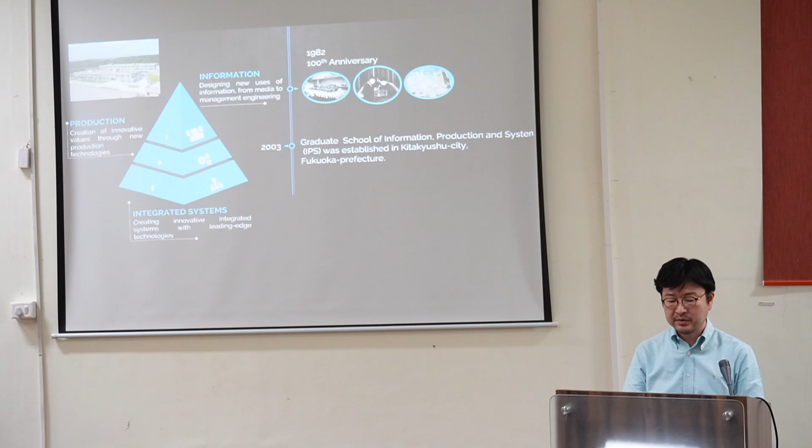In 2003, our Graduate School of Information, Production and Systems was established in Kitakyushu, Fukuoka—not in Tokyo, but in Fukuoka. This graduate school has three fields: the Information Architecture field, the Production System field, and the Integrated System field. We call this IPS. In 2022, we celebrated the 140th anniversary.

Waseda University has in total around 50,000 students, and among them around 7,000 are international students. So there are many international students in Waseda University. The IPS is located in Fukuoka—here is Tokyo, but we are located in Fukuoka. In Fukuoka, there are many international students, and we are recruiting students not only from Japan, but from many countries.

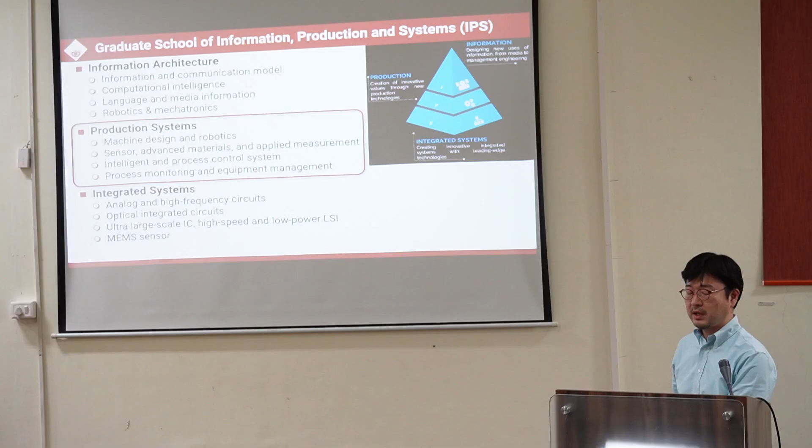As I told you, the name of our school is the Graduate School of Information, Production and Systems, and we have three fields. I belong to the Production Systems field, and Professor Matsumaru, who will have a talk the day after tomorrow, belongs to the Information Architecture field. Each field has around 9-10 faculty members, and inside the Production System field there are 9 professors now. There are several professors who research robotics. So this is a brief introduction about our graduate school.

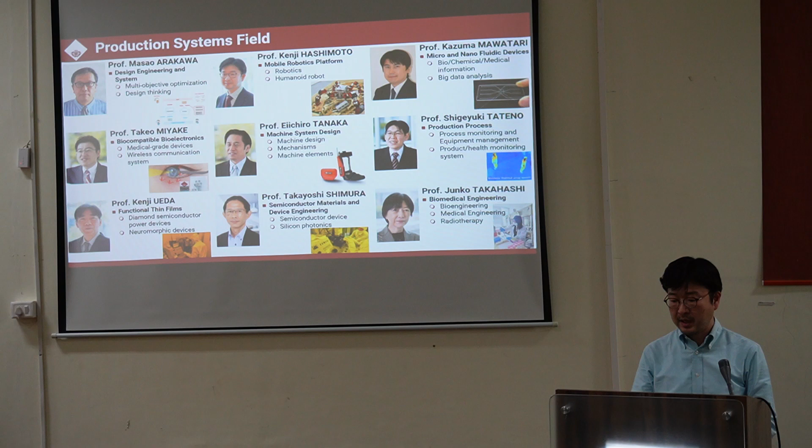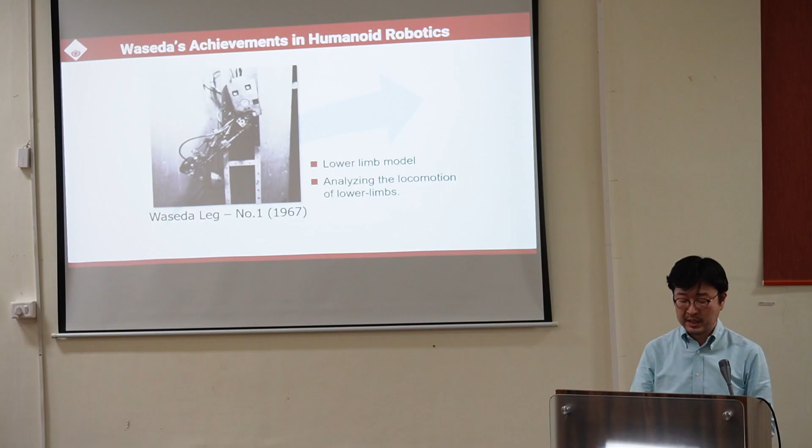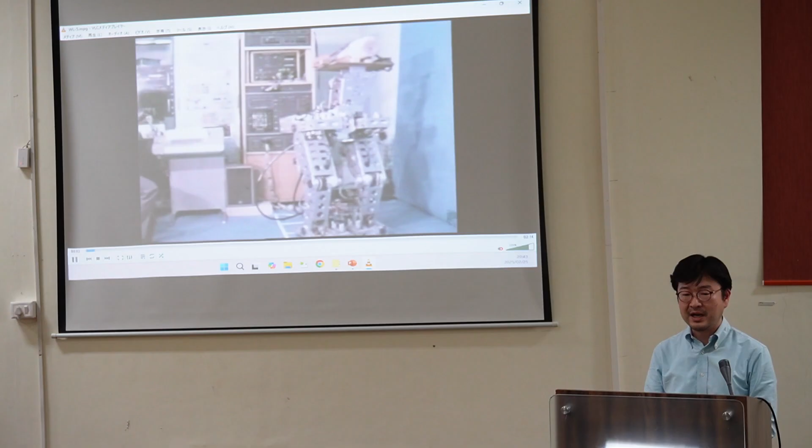I research humanoid robots, and the history of humanoid robots at Waseda University is a long one. In 1967, we started research on the Waseda legged robots, and we continued this research, developing the fifth prototype named Waseda Leg Number 5. Here are videos of the old Waseda Leg Number 5, taken in 1971, around 50 years ago.

At the time, this video itself is very old—here is a kind of computer, but the specifications are worse than a smartphone today. Still, around 55 years ago, the robot realized two-leg walking, though it took around 40-50 seconds to make one step. It looks like it might fall down, but the main materials are made of iron, so the robot itself is very heavy. The robot tried to maintain the center of mass, or center of gravity, inside the support polygon—the center of pressure inside the support polygon. So this was Leg Number 5.

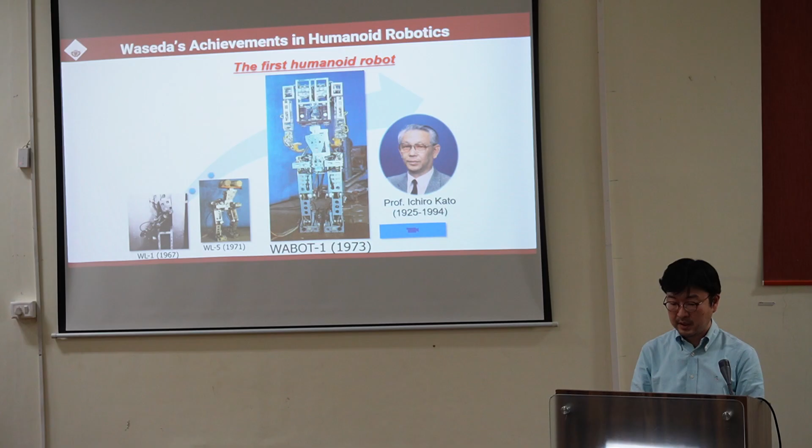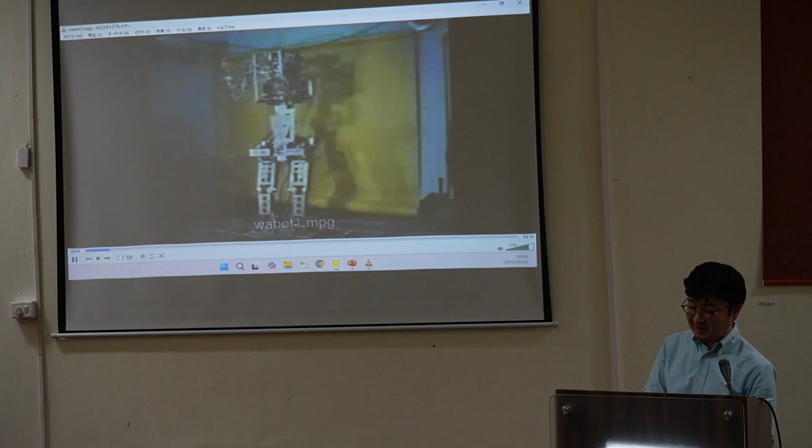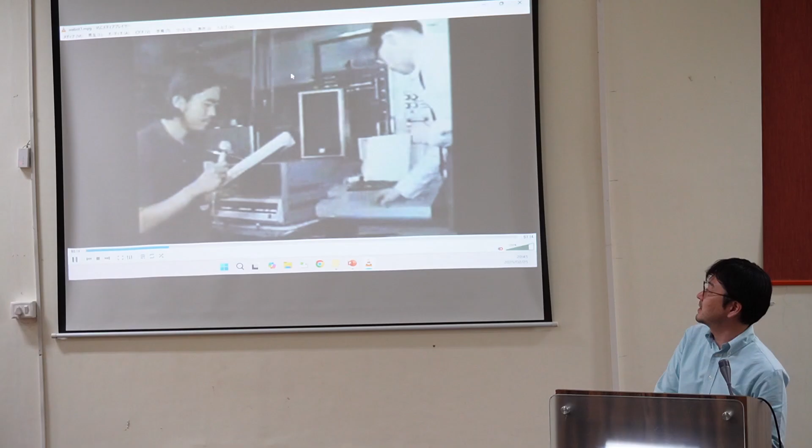We continued researching humanoid robots, and Professor Ichiro Kato managed the robotics team and developed WABOT-1—the first human-sized humanoid robot in the world. Here are videos of WABOT-1. The lower limb is the same as Leg Number 5, but now the robot has two arms and two cameras—this looks like a body, but there are two cameras inside. By using the arms, the robot could write several characters and so on. So this is the upper body of WABOT-1, and here are videos of the lower body, which is the same as Waseda Leg Number 5.

After that, we continued to improve the bipedal walking technologies, and we developed Waseda Leg number 10 and number 12 and so on. Here's a video of Waseda Leg number 12, taken around 1991. At the time, the robot's walking speed was much improved, so it took less than 1 second to make one step.

But this video was very old.

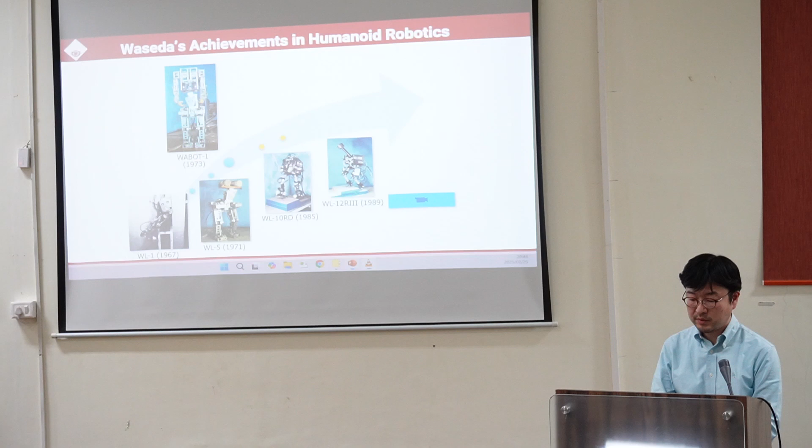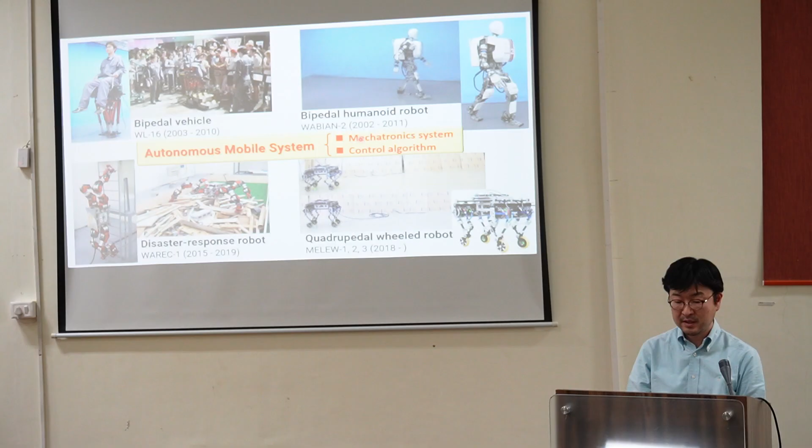So this was Leg number 12, and then we wanted to develop the humanoid robot, the Waseda Bipedal Humanoid robot. This kind of robot was mainly developed by my supervisor, Professor Takanishi. Under his supervision, I graduated from his laboratory, and this is my bachelor, master, and PhD thesis research.

We developed the bipedal chair, and this is me—this photo itself was taken more than 20 years ago. At the time, the robot realized climbing up and down stairs while carrying humans.

After getting my PhD, I joined the humanoid group and did research about the humanoid robot. I also continued researching electric robots for disaster response, and quadrupedal wheeled robots. Later I will explain the details of these robots.

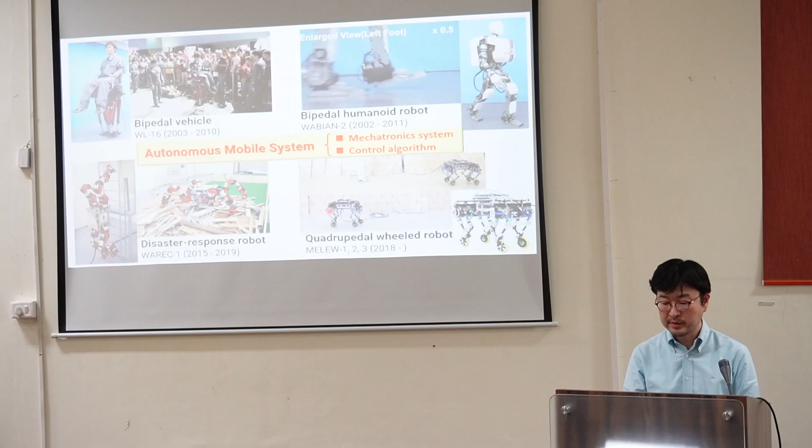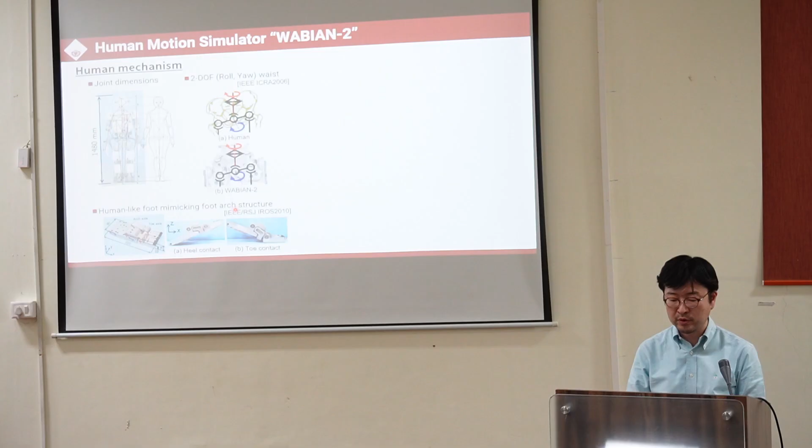The reason we researched humanoid robots is to understand humans. We mimic the mechanisms of humans, like joint dimensions. Humans have a waist, and since humans can move the waist, the waist part is important to realize human-like walking. Humans also have foot arch structures, and some scientists say the foot arch structure can contribute to bipedal walking. By using the robot, we can evaluate quantitatively how the human foot arch structure contributes to bipedal walking, because the humanoid robot has many sensors.

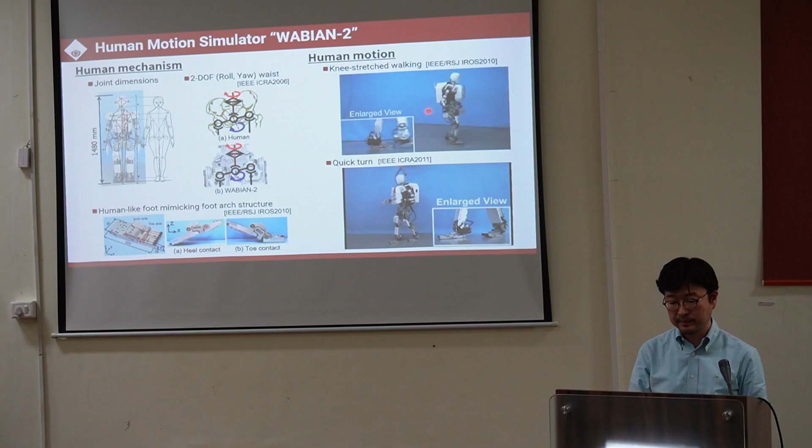This is knee-stretched walking. During the walking, the waist—the pelvis—moves like humans, and by utilizing this kind of joint, the robot realizes knee-stretched walking.

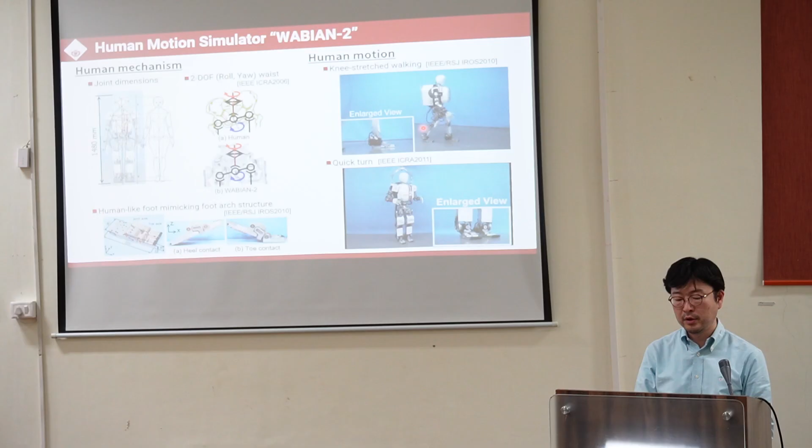After getting my PhD, I worked on motion generation for this kind of robot and on the mechanical parts. Based on this kind of technology, there are many applications.

First, we collaborated with a sports scientist. This is the motion capture data obtained by ourselves. Waseda University is also famous in the field of sports science, and we collaborated with professors in sports science. Most sports scientists measure humans from the side.

But when we researched bipedal humanoid robots, we realized that waist motion is also important. So we proposed to the sports science professors to obtain data from the front of the humans. Surprisingly, we noticed that during running motions, humans also utilize the pelvis, the waist motion—so not only leg motions, but waist motion contributes to kicking motions and so on.

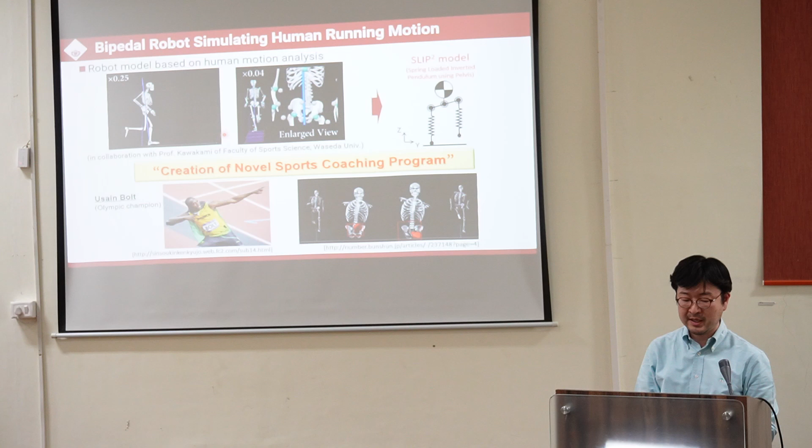After obtaining this kind of data, we were surprised that several TV shows said Usain Bolt, the Olympic champion, also utilized pelvic motions, the waist motions, during running.

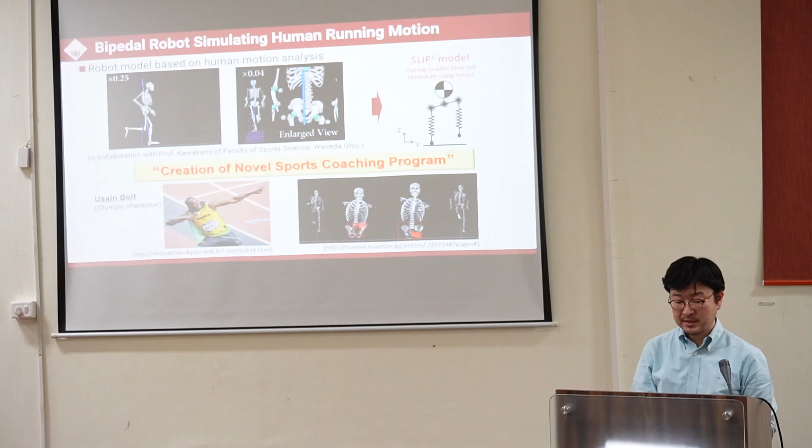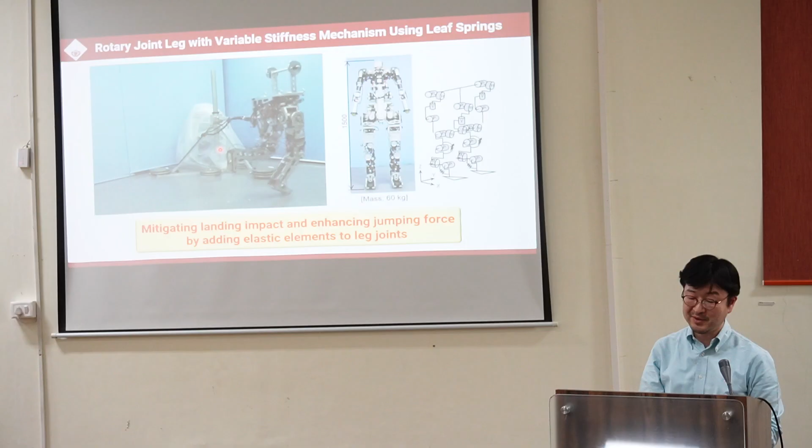So we were surprised. But based on this analysis, we developed a simple legged robot which has a waist. Humans also have a kind of mechanical spring in the legs, inside the muscles and tendons, so this is a simple mechanism—just compression springs here, and a waist here. Just using the waist motion, the robot could jump. Based on this, we developed leg parts like this, but the control part wasn't so good—still, the robot could jump a little.

We developed the lumbar joint to simulate the running motions. This is one application of the humanoid robot, and the next one is a collaboration with psychology researchers.

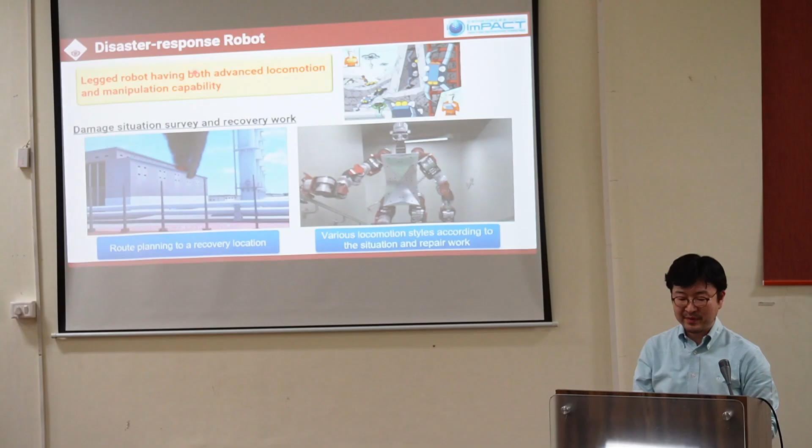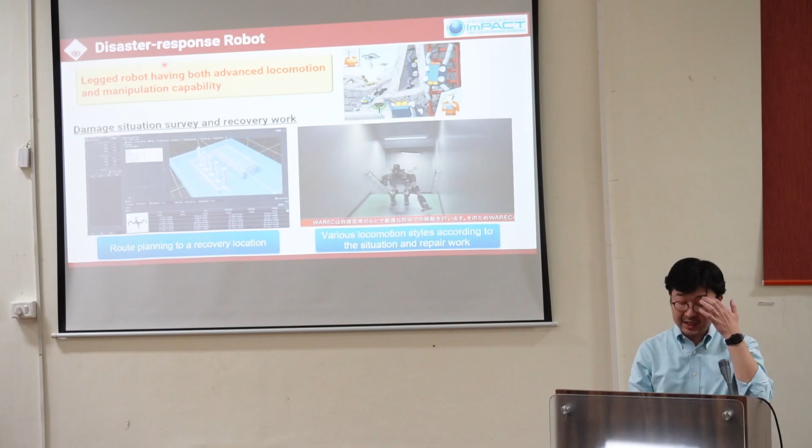So this is the application with correlations to psychology. The next is disaster response. In 2011 there were big earthquakes. At the time I was in Tokyo, and I was surprised the building was shaking heavily. Unfortunately, the nuclear plant was damaged, and it was very dangerous for humans to enter such a nuclear power plant.

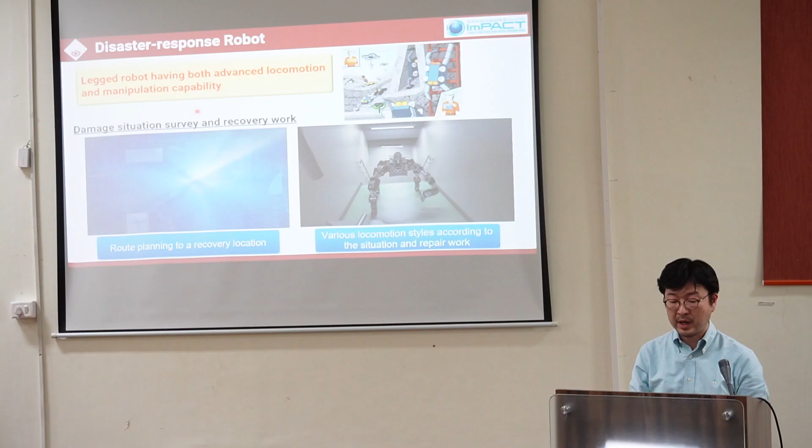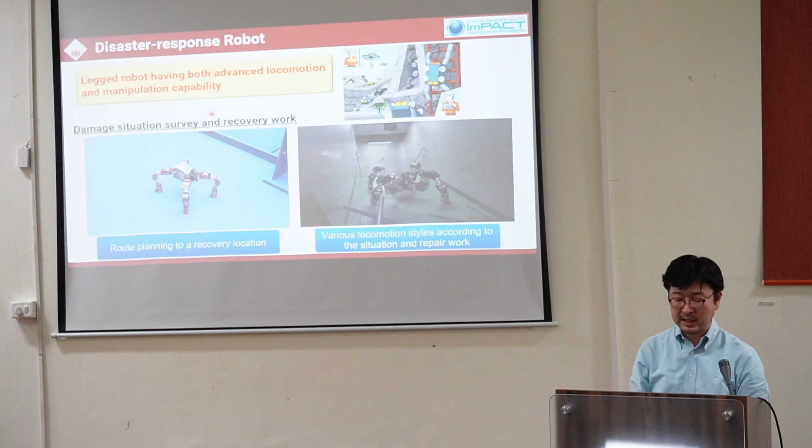But what is important is the damage situation survey and recovery work. In the future, it would be very nice if there were robots which can work on behalf of humans. Around 2018, there was a national project.

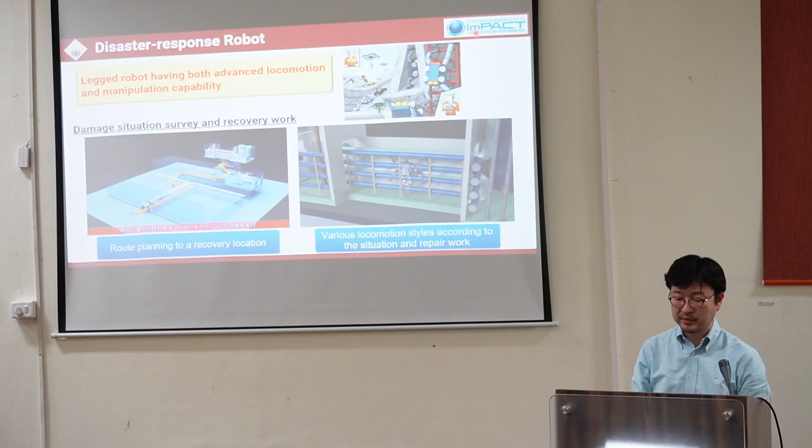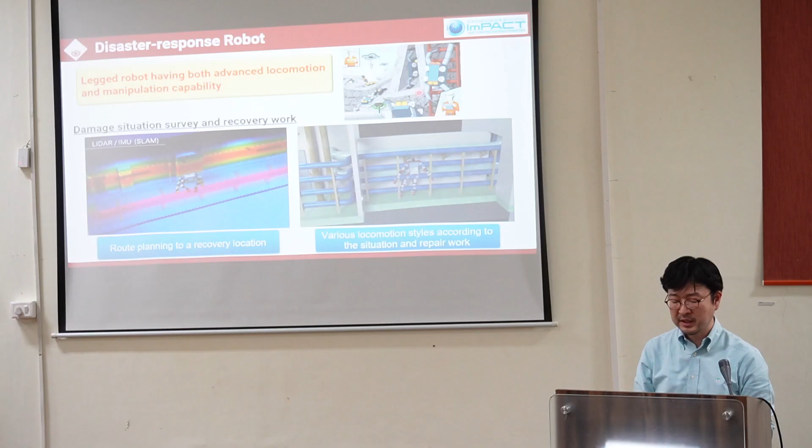The project name was ImPACT, conducted by the Cabinet Office of Japan, and we tried to develop legged robots which can work on disaster sites. In this project there were many researchers; some worked on flying robots, and others worked on snake-type robots and so on.

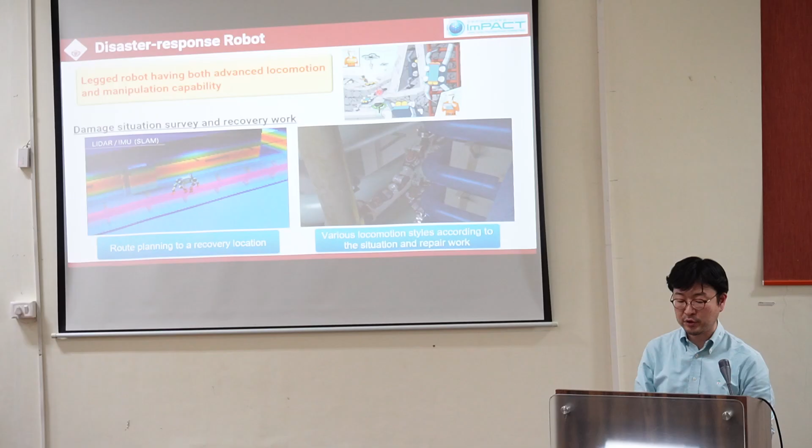We were in charge of developing the legged robots. In this project we designed legged robots that can do not only bipedal walking, but also crawling motions on rough terrain with rubble piles, because bipedal robots easily fall down on rubble piles. That's why we chose crawling motions for rough terrain.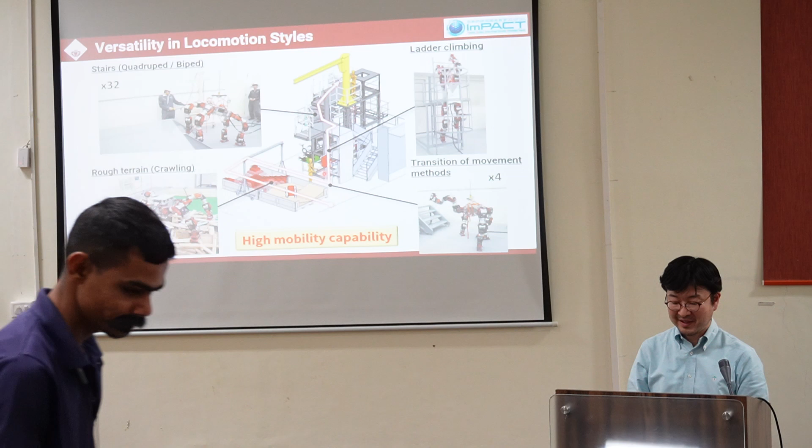If there are vertical ladders, the most challenging point was climbing up the vertical ladder. This was a very challenging environment for the robot to climb. But this kind of— I'm sorry, my PC crashed.

In this project we developed not a humanoid robot, but a legged robot. There are many videos, but my laptop does not have a GPU. Let me restart the PowerPoint.

When I was a student, there were no GPUs, so the robot just used a CPU. Nowadays it's important to use a GPU for environmental recognition for robots. This is the same slide, I think—the robot climbs up the vertical ladder and also climbs up stairs, something like this.

So far we were working on the hardware side and the motion generation part of the legged robots. This is the electrical system of this robot. The name of this robot is the WAREC, the Waseda Rescuer, and there is one CPU.

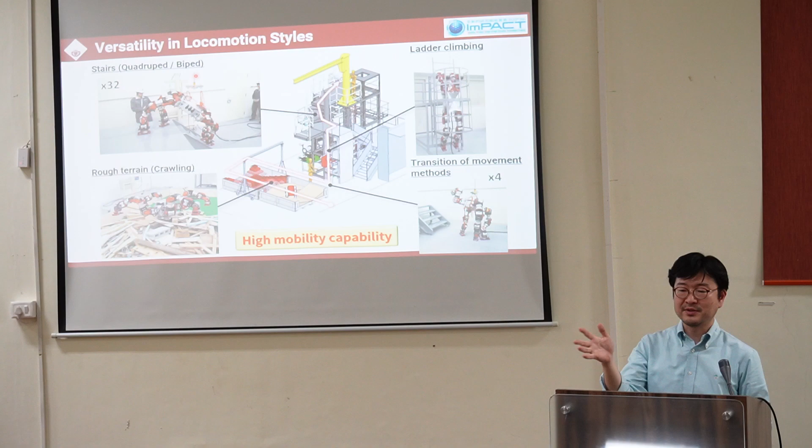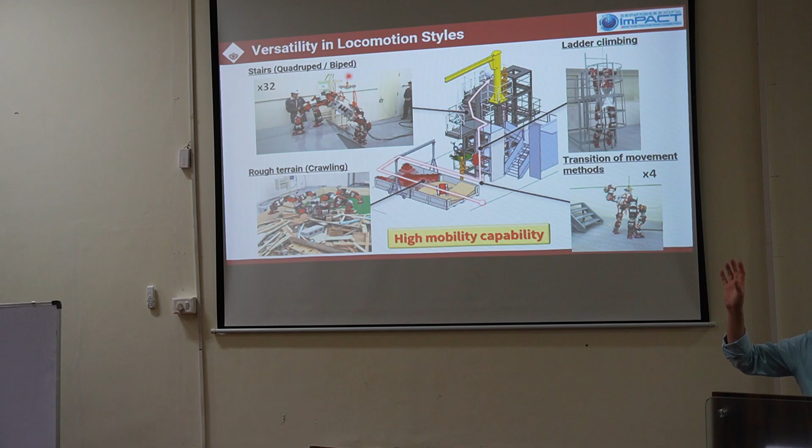In these videos, the robot does not have environmental recognition sensors like cameras and lidars, so the robot already knows the environment at this stage—it's a known environment. Later I will briefly tell you about integrating vision sensors into this robot. At this stage, the robot just has one CPU, and measures acceleration, angular velocity, and the angles of the robot bodies.

There is one IMU, inertial measurement unit, and for communication protocols, at the time we used EtherCAT. CAN is famous for communication protocols, but CAN's communication speed is a bit slow, so we chose EtherCAT. There's also a USB module to use force-torque sensors.

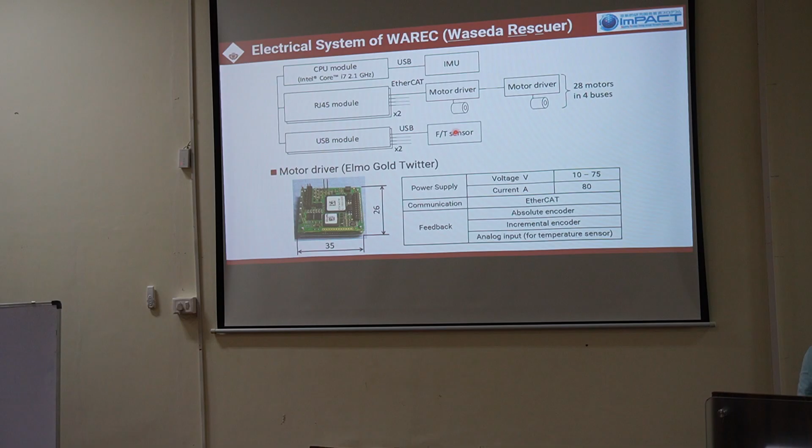In this project we were in charge of developing the legged robots. This is the improved version of the robot. We implemented lidars to measure the environment, and there are two stereo cameras which help with remote control of the robot. This is the inside of the robot bodies.

In this improvement, we implemented the batteries. There are also four lidars and two cameras, shown in orange. For environmental recognition, we collaborated with many researchers.

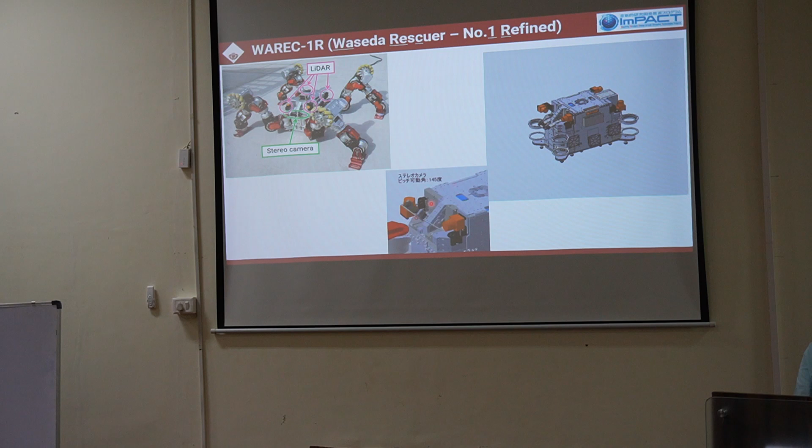In this project, for the electric robots, there are around 12 teams, including one from Tokyo Institute of Technology, which last September changed its name to Science Tokyo.

Professors from Science Tokyo and AIST, a national institute, worked on simulations of the robot, and their hardware focused on hydraulic actuators and robotic hands. But this robot used electric actuators.

Hydraulic actuators were developed for the next versions, but that next version was never developed. Several researchers were interested in hydraulic actuators, but this robot used electric actuators.

What will be important is the environmental recognition part. Audition is like human ears, and at disaster sites, sound source localization is sometimes important to detect and find persons. Also important is image processing, including SLAM, simultaneous localization and mapping.

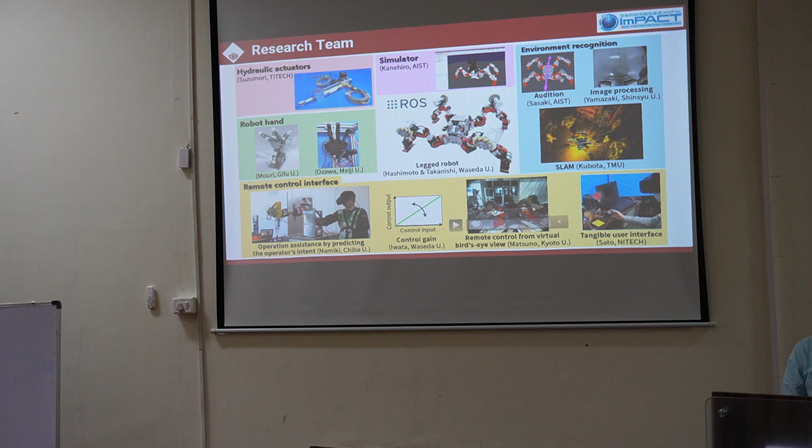There were also several user interfaces, including tangible user interfaces, so this kind of integration. Just yesterday we had a project meeting, and we have obtained a lot of experience about system integrations.

In this project, as I mentioned, other researchers are working on the environmental recognition part and also the remote control part, so there are many operators and researchers in different universities.

PC1 and students from Kyoto University worked on the bird's eye view image, and researchers from AIST worked on sound perception and so on. There was just one robot, but behind the scenes there are many researchers and students, many operators, and many applications.

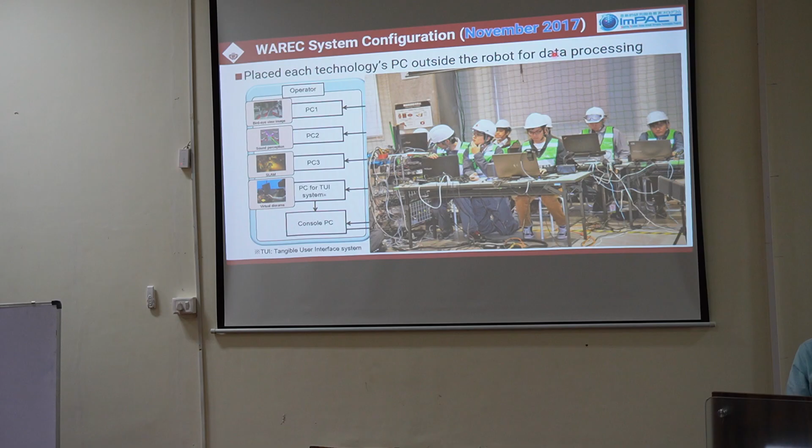So this is not realistic. During this project, this picture was taken in 2017, and one year later we continued to integrate the systems. The appearance of the robot is the same.

But PCs were implemented inside of the robot, which is a kind of system integration. Of course there are PCs outside the robot for teleoperations, but for environmental recognition we use the PCs inside the robots.

So to develop just one robot, there are many researchers. During this project, I was very busy just for setting up the meetings. So you can imagine how difficult it is to manage the meetings.

At that time, this was before COVID-19, so online meetings were not so familiar. Now we can easily set up online meetings, but this was just before COVID-19.

So this is one application, and the last application is a theater, a kind of theater robotics. We collaborated with one company, and do you know the manga artist Osamu Tezuka?

Osamu Tezuka's most famous comic is Astro Boy, Tetsuwan Atom in Japanese. Also in his comics, there is one named Blackjack. Blackjack is a kind of illegal doctor.

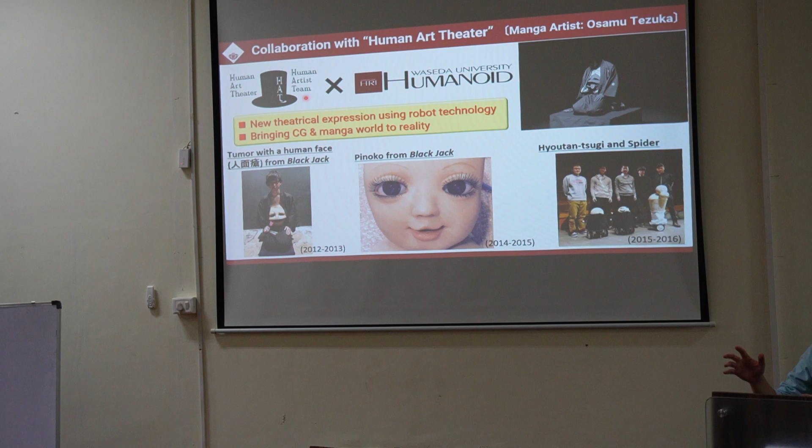So this human theater wanted to do the act in a real theater, and robotics technology can contribute to this kind of realistic real act.

So this is the artificial heart. This mechanism is very simple, we just use a one-cam mechanism. But if we put the exterior on, something like this, it looks like a real heart.

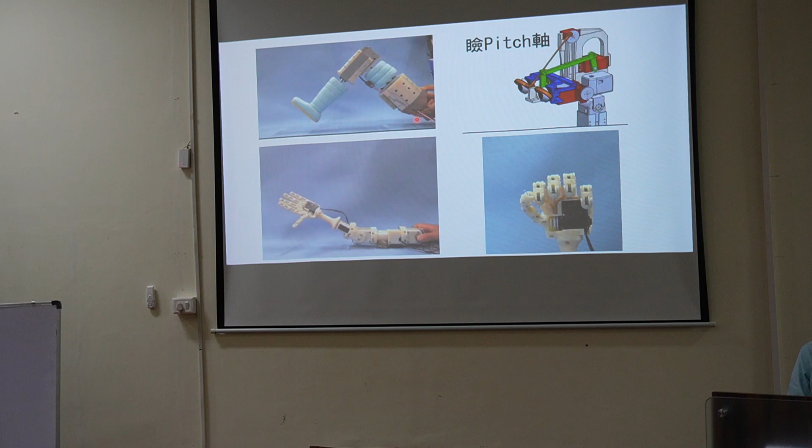And also we developed the Pinoko legs and the Pinoko arms and the Pinoko hands and the Pinoko heads and so on. Here's Pinoko, and during the...

In the theater, the actors integrated, combined, and assembled each part, and during the theater performance, the actor developed the Pinoko.

This picture looks very cute, but we took the pictures from the bottom side, so it looks very cool.

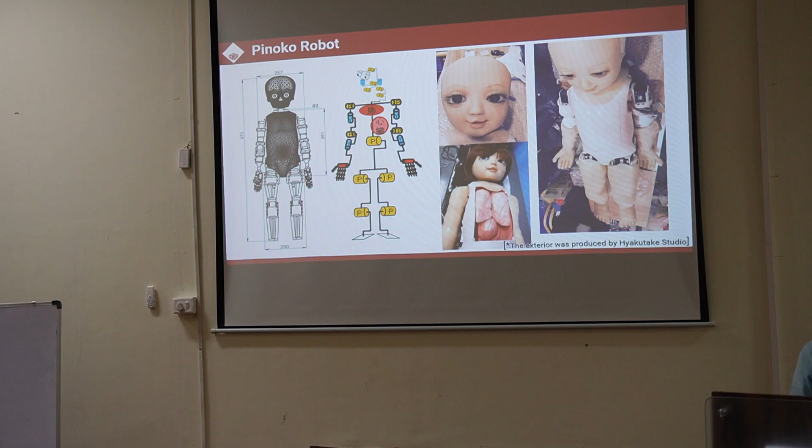So this is what I did until 2017. Since 2018, I've been independently running my own laboratory.

After that, I continued to work on robots, and I think we can summarize it as adaptive robotics. One is environmental adaptive robotics, meaning the robot can adapt to the environment. Also, intuitive adaptive robotics means the robot can adapt to humans—intuitively understand human intentions and perform appropriate actions. These are kinds of human-robot interactions.

Regarding environmental recognition, to adapt to the environment we need a lot of knowledge, but thanks to the previous disaster response project shown in this slide, I could obtain a lot of knowledge. So now I'm working on environmental recognition. So far I just worked on the motion generation part for the legged robots, but now I'm working on the environmental recognition part also.

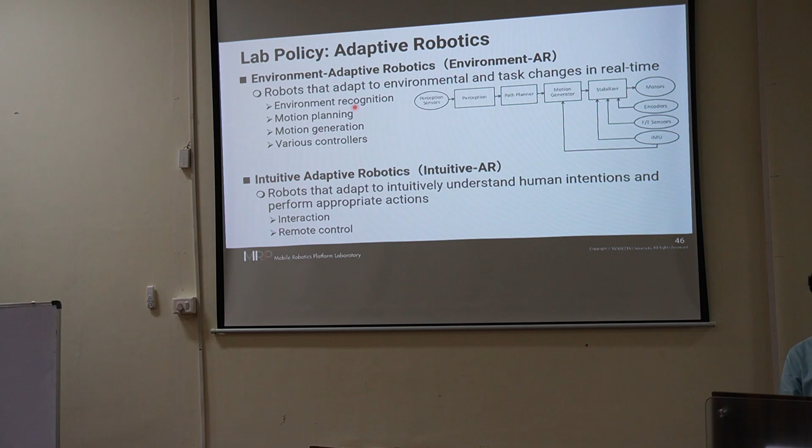So first, this is the environmental recognition. Many researchers are working on recognizing the shape of the environment, but one more important thing may be environmental property estimation, like slipperiness and softness and so on. If we look at chairs, we can imagine that this is not hard but soft. This kind of estimation is also helpful for the robots.

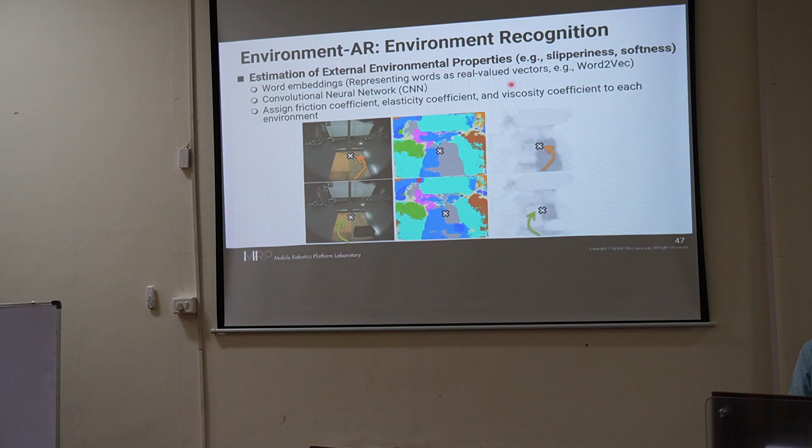So we use a kind of deep learning method to estimate this kind of environmental property.

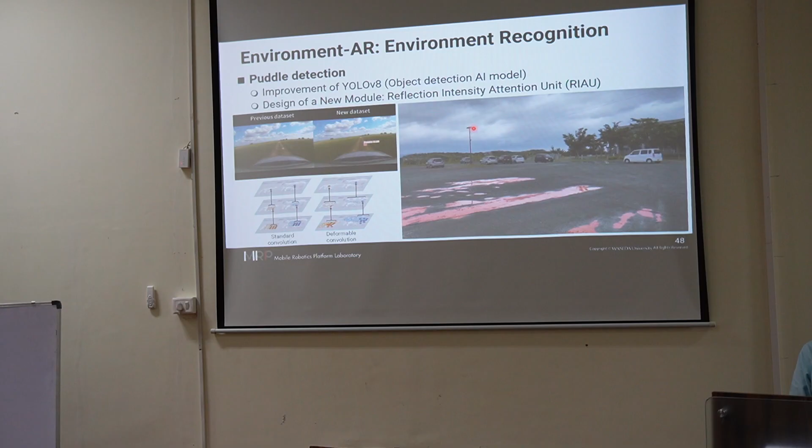One student in my laboratory worked on puddle detection. Puddle detection is not so important for cars, but ice—here it's too hot so it's a bit difficult to find snow and so on. But for mobile robots, sometimes we need to detect puddles and also icy environments, which are very slippery.

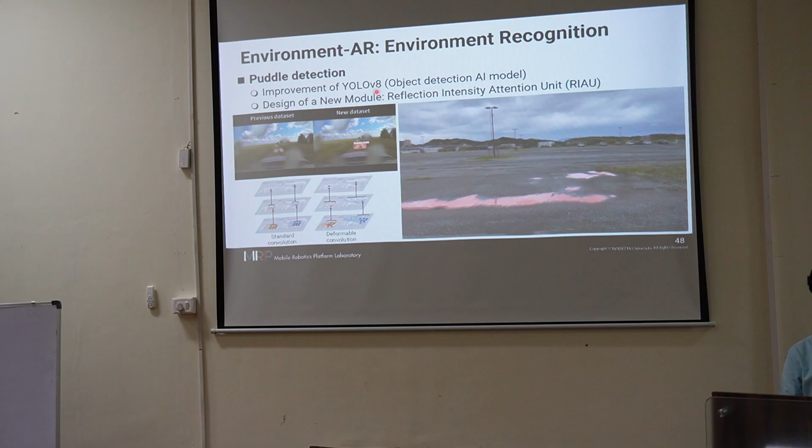Some students, I think some audience know about YOLO, which is an object detection AI model. Based on this, we improved it, and this is the real-time recognition of puddles.

And also this time, one more environmental recognition research. So in the disaster site, there is smoke, and also sometimes there is fog and so on. So if we just use the normal RGB cameras, it's impossible to see behind the smoke and so on.

So this is just research, computer vision research as well. I know about this, but I'm working on these kinds of topics.

And if we can recognize the environment, what will be important is the motion planning and the motion generations. The challenging point is the motion generation of the legged robots, which is still challenging. But nowadays, by using machine learning, there are many good humanoid robots and legged robots.

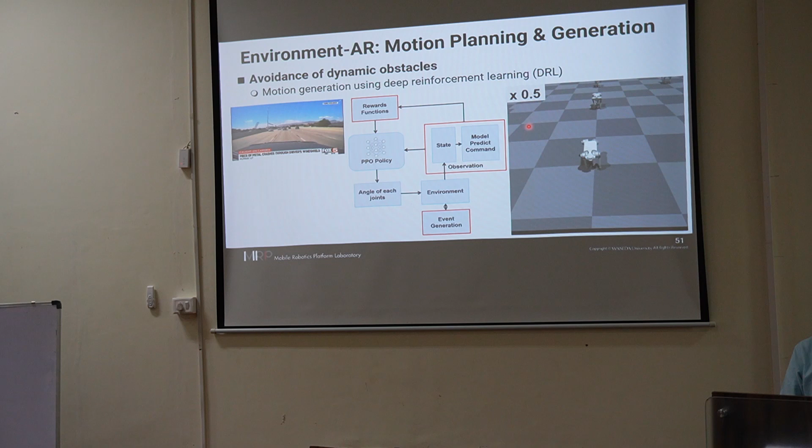So I also studied manipulation research, and of course for manipulation, object detection like environmental recognition will be important. Also for manipulation, in these videos, the robot just uses simple grippers, but estimation of the center of mass is also important sometimes.

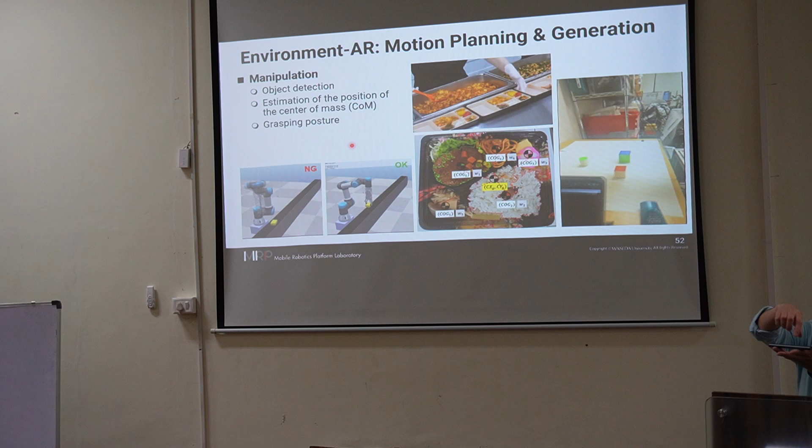But if the center of mass is not centered, it can rotate and it's easy to fall down. But we can estimate the center of mass, which will be helpful for the movements.

So I started to work on the manipulation research. But also...

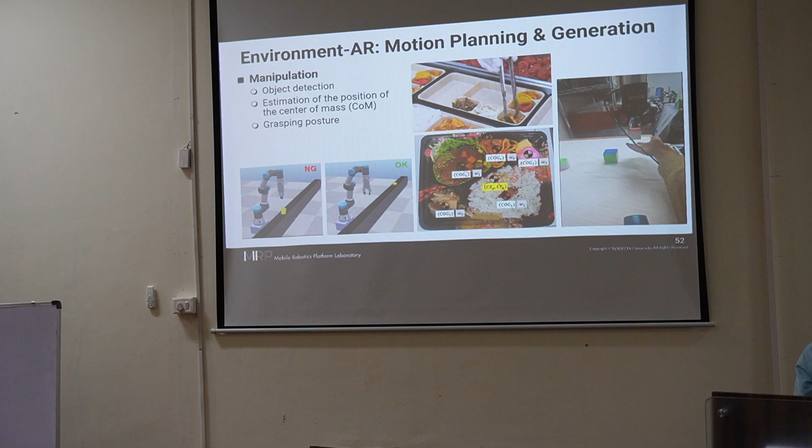to realize that in the real world, the real hard - we need real hardware robots. So nowadays, there are good commercial legged robots, but still there are several limitations. So we try to invent new mechanisms.

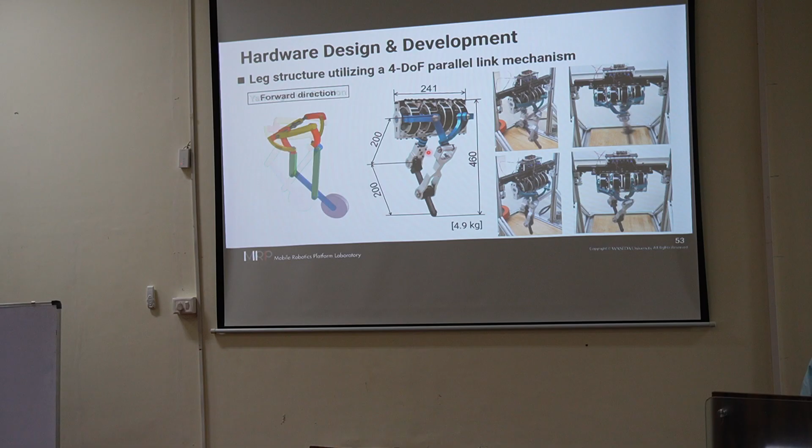So this is the one-leg robot, but based on this, we have developed quadrupedal robots and two-leg robots. So this is the motion generation part.

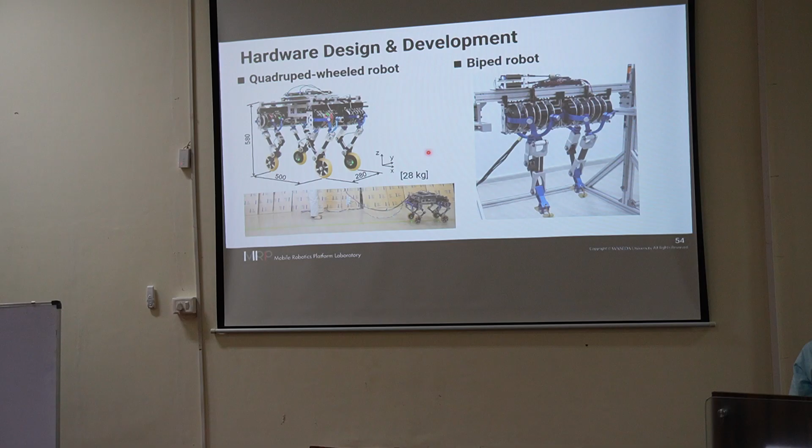And for the remote controls, also I'm not familiar with AI, so I continue to research. I continue to study about AI like a student.

Research, but we are working on these kinds of topics using legged robots and also mobile manipulators. So this is fully remote control by using hand gestures, fully remote control of the mobile manipulators.

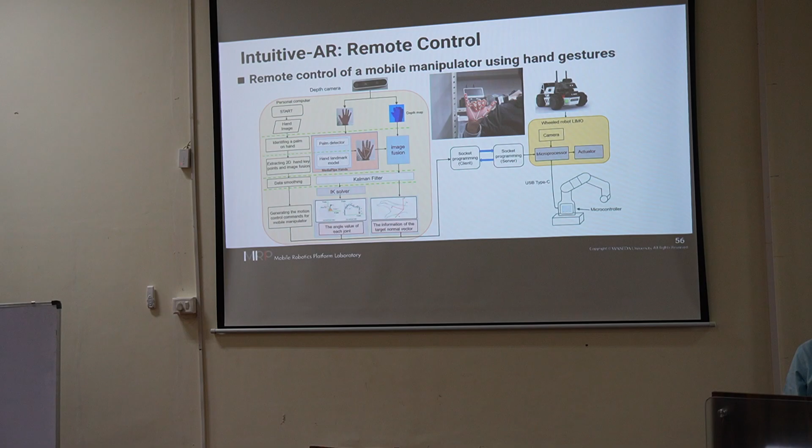So this is a wheel robot with arms, teleoperated just by using hand gestures. This is not perfect, but we continue to try to find what are the better ways for remote control of mobile robots with arms.

So this is the mobile robot, this is the wheel robot with arms, but now we have leg robots with arms. So now we are trying to integrate such kinds of leg robots with arms.

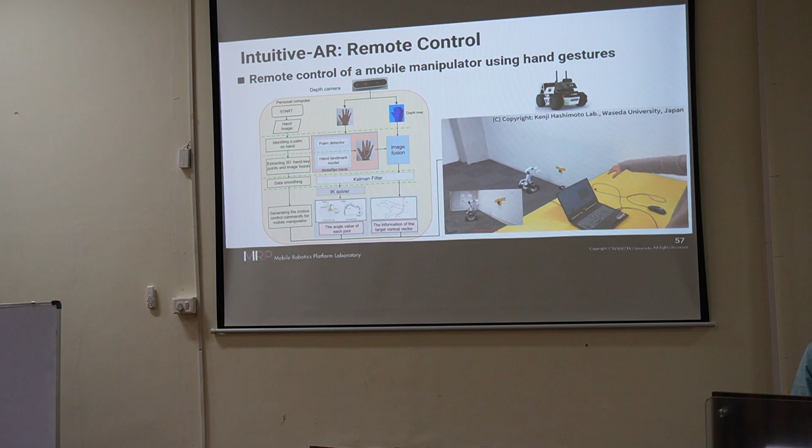Okay, so my specialty is about robotics, but like a student, I continue to improve my skills about AI. So using robotics and integrating robotics and AI will be important. And also by using our knowledge, what is important is to provide a solution for solving social issues.

So of course, China and the US, and there are many companies developing humanoid robots now. Unfortunately, there are just a few companies in Japan developing humanoid robots now.

I research on humanoid robots, but I have several doubts if the humanoid robot will be useful or not in human society. So concerning the short-term range, I think other technologies besides humanoid robots will be helpful.

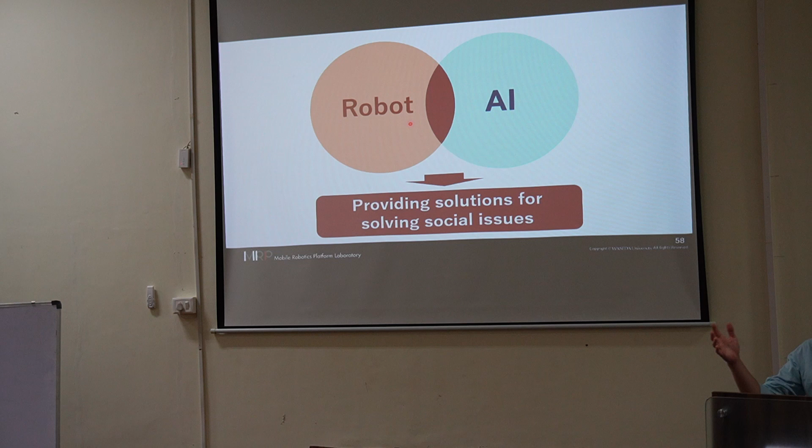We have a collaboration with several companies to improve operational efficiency in the lodging industries. In Japan there are many tourists, but the number of laborers is decreasing. The lodging industry company told us several problems, and one is waste measurement in the garbage pits.

So we just use sensors and controllers. There are no actuators, no motors, but by using our technologies about sensors and sensor data analysis, we can estimate and measure waste quantity and waste volumes.

Also in Japan there is a big public bath in the hotels and so on, and cleaning the public bath is also heavy work. Indoors there are cleaning robots like Roomba, but there are still no robots which can clean the public bath. The public bath is very large, so every day they must clean it.

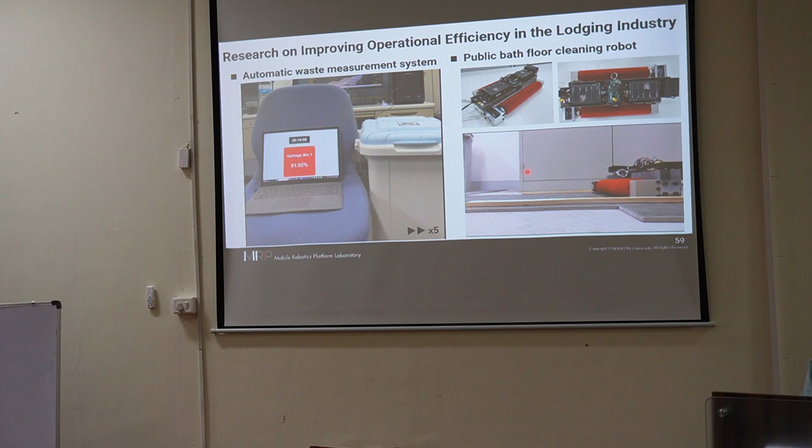So we have developed this - it's just a prototype, but we continue to improve this kind of robot. So this is the robot. Based on the technologies of humanoid robots, in my laboratory we are developing technologies to improve operational efficiency, something like this. Okay, my time is 45 minutes, and this is the last slide.

If the machine has these three key components, it becomes a robot. Nowadays the controller includes AI, artificial intelligence. So, this is my opinion, but applying humanoid robot research to benefit society is important.

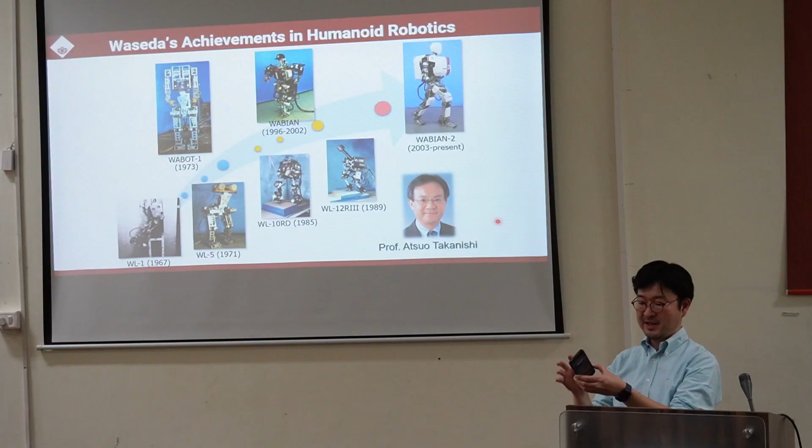Also the price of sensors is important. When I was a student, IMU sensors were very expensive. At that time it was very expensive, but nowadays smartphones have IMU sensors, so the price surprisingly decreased.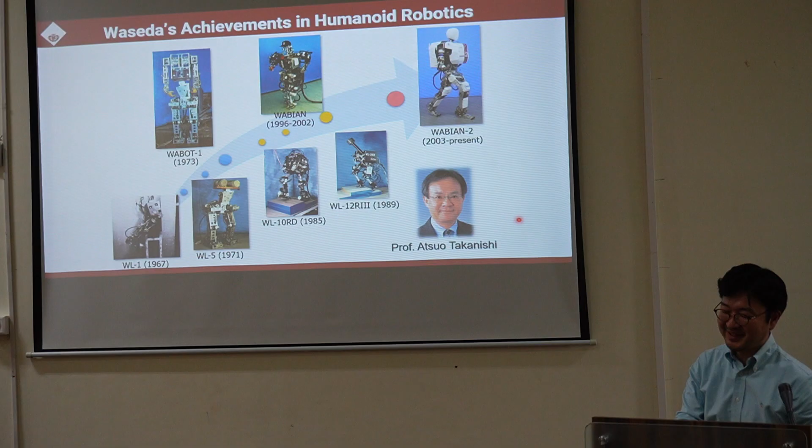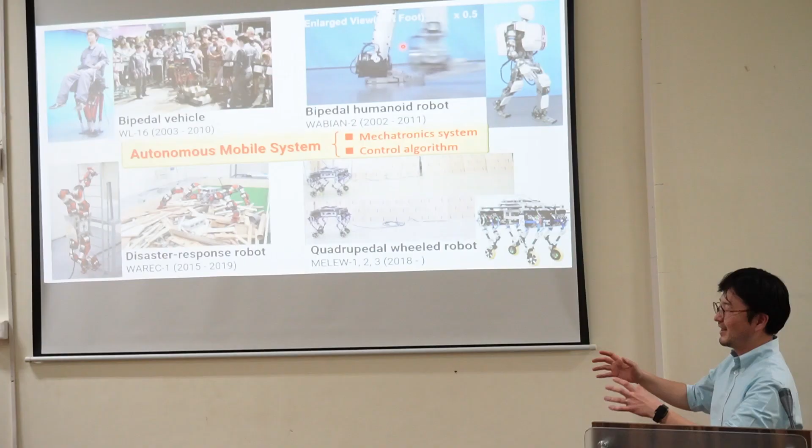I think the most important thing is robust hardware. And next is that the robot is very expensive. So when I was a student, if the robot fell down, it broke down. This video was taken without a lift, but behind the scenes, outside the video, we prepared to catch the robot if it falls down.

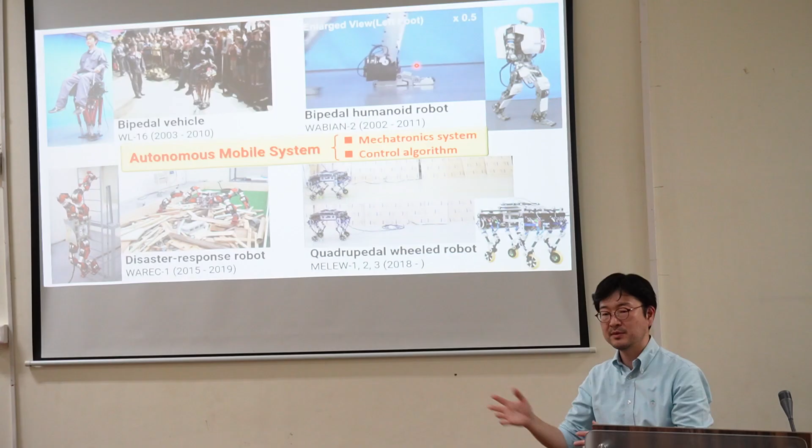But at the time, if the robot once fell down, it broke. Nowadays, the weight, the mass, is also important. The mass used to be very heavy, like 60 kilograms. But nowadays Chinese humanoid robots are more like 30 or 35 kilograms, because the height is smaller, like a kid, like a child. So the size becomes small, and if the size becomes small, we can use small actuators like those used for drones, for flying robots. That's why I think the robustness of humanoid robots has been increasing.

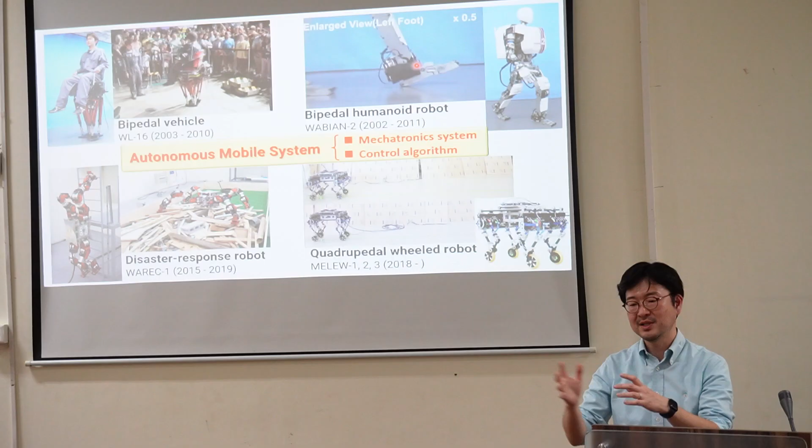Pricing is also important. There is also a gap between simulations and the real environment, so the best way is of course to use a real robot for learning. But for that purpose we need robust hardware. As I told you, the reliability of robots became good, and the gap between simulations and real robots is becoming smaller and smaller, and there is good hardware now. That's why there are several research efforts, many researchers using machine learning for robot design research.

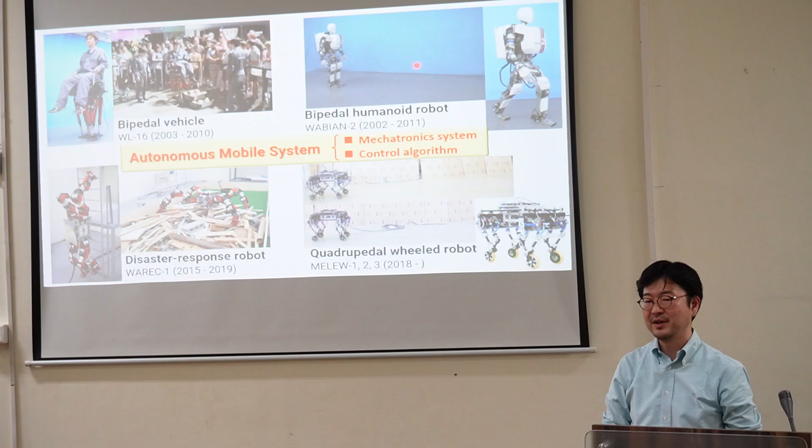Professor Hashimoto, I have a question. I found from your biography that you did your bachelor's, master's, and PhD in mechanical engineering. So as a mechanical engineer, what do you think should be the direction in which education and research in mechanical engineering should move at this point? Because you work in many areas like AI, computer vision, augmented reality, etc., the scope of your work is stretching really big, working in wider and wider areas.

But first, for a student, what's important is to decide who will be the professional in one field. In my case, it was mechanical engineering. This is my supervisor, Professor Takanishi, and his policy was something like this: we belong to mechanical engineering, but for the bachelor thesis we developed real hardware, and for the master thesis we developed the motion control part. Through this kind of bachelor and master thesis, we could obtain both the mechanical engineering part and the control systems part.

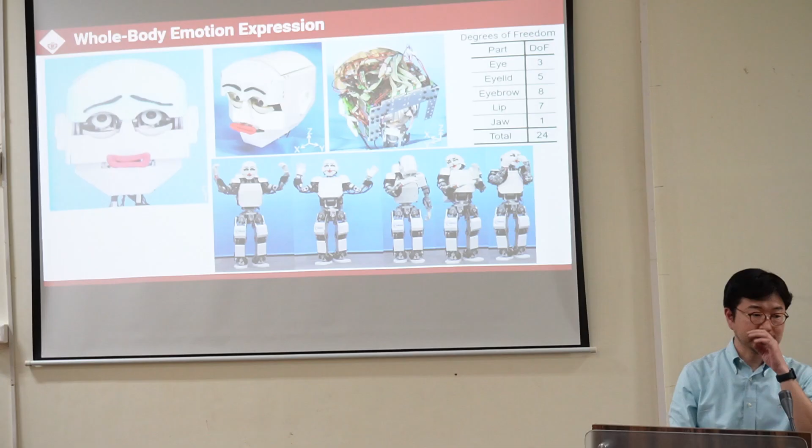So there are sessions about robotics and ethics. Where was this applied, the application for this whole body emotion?

At that time, the goal was to increase interactions between humans and robots. Nowadays when we present at conferences, people always ask why we don't just use a display - if there's a display, we don't need to develop these complicated heads. But if a robot has a display and a human looks from the side, the human cannot recognize the face. So that's why. The application is also to understand human recognition, which is an interesting topic.

This time I skipped these videos, but...